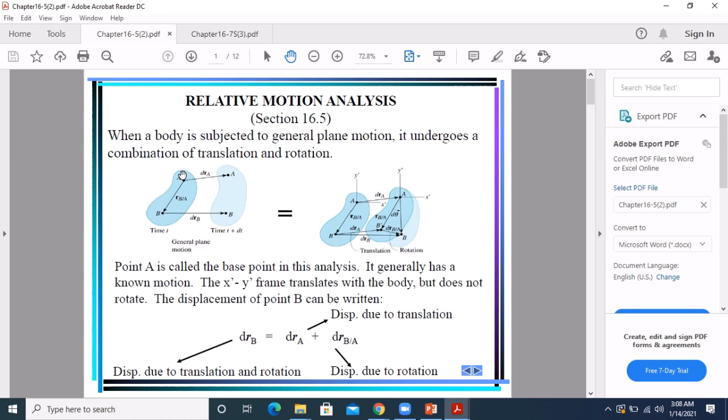بدي اقسم الموشن كالتالي، بدي اخليه يعمل translation. خليني بس هون اعمل full screen. بدي اخلي الريجد بودي هذا يحافظ على الروتيشن تبعه بالبداية، يعمل translation at this point، فمشى مسافة DRA اللي هي جزء من البوزيشن او displacement تاعت البوينت A اللي مشيتها because of translation لحاله.

بعدين هذا الريجد بودي عمل rotation about an axis passing through point A عشان ياخد هذا الشكل النهائي أو اللوكيشن النهائي، ليش نحكي شكل نهائي؟ لأنه الشكل تماما ما تغير. فعمل translation DRA، فالـ B point بسبب الترانزليشن موقعها موجود هون. بعدين صار في روتيشن للريجد بودي فصار الفاينل بوزيشن تبعها هون، يعني هاي الفاينل بوزيشن تبع B اللي بيست على الترانزليشن او روتيشن. بدي اقسمه لـ translation first then rotation.

فصار عندك الـ DRA اللي هو بيست على translation، وهذا الـ DRB اللي هو final position اللي هو ناتج من DRA plus this rotation of B من هذا اللوكيشن لهذا الفاينل لوكيشن، اللي هو عبارة عن DRB with respect to A، لأنه احنا بنحكي الـ rotation about an axis passing through one of the points اللي هي point A بهذا الكيس تبعتنا. فصار عندي DRA plus DRB with respect to A عبارة عن DRB.

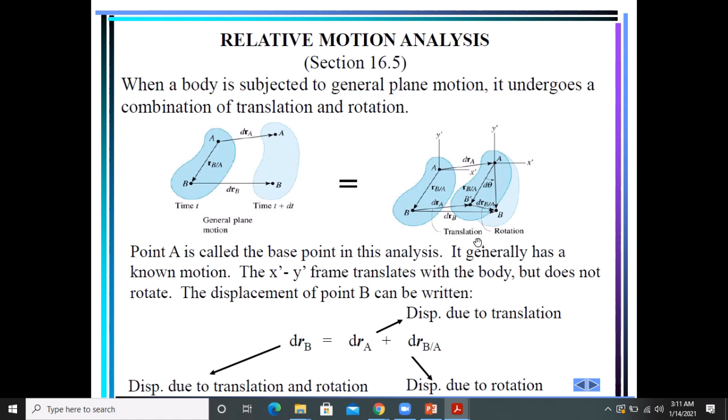So حكينا but does not rotate. The displacement of point B can be written DRB عبارة عن DRA اللي هي displacement due to translation plus DRB with respect to A اللي هي due to rotation، بيعطيك الفاينل location for point B based on translation and rotation.

So the velocity of point B is given as بدك تاخد dt for this one and this one. So DRB by dt عبارة عن DRA by dt plus DRB with respect to A by dt. DRB by dt هي الـ absolute velocity of point B، اللي هي الفاينل، يعني velocity of point B الناتجة من translation and rotation، يعني عبارة عن velocity لـ point A اللي عم بيعمل pure translation plus the velocity of point B with respect للروتيشن اللي حصل about point A. فهي whatever rigid body عم بيعمل whatever الموشن تبعته general plane motion VA.

الريجيد بودي هيعمل translation، هيكتسب A و B the same velocity بسبب translation. Then B هتكتسب another component velocity بسبب rotation of rigid body about an axis passing through point A اللي هو عبارة عن أوميجا في RB with respect to A. Since the body is taking as rotating about point A, VB with respect to A اللي هي عبارة عن dr B with respect to A by dt عبارة عن أوميجا cross RB with respect to A. Here omega will only have a k component since the axis of rotation is perpendicular to the plane of translation.

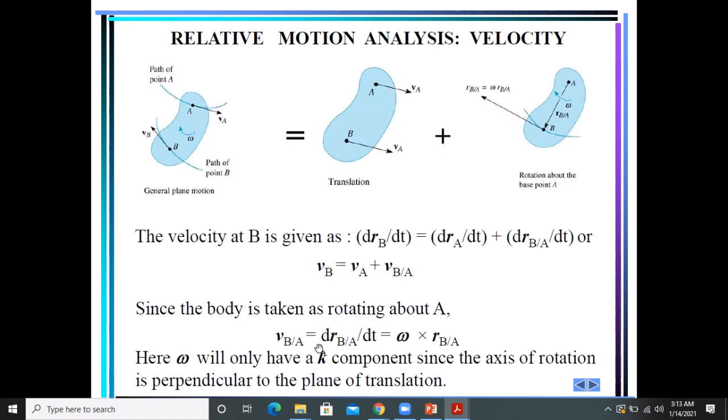طيب ناخد example relative motion analysis velocity.

Example: suppose you have this rod connected with pin connection, so the velocity of point B equals velocity of point A plus omega for rod AB crossed with RB with respect to A. From the other side, velocity of point B equals velocity of point C plus omega BC crossed with RB with respect to C. So when using the relative velocity equation, points A and B should generally be points on the body with a known motion.

Often these points are pin connections in linkages. For example, point A on link AB must move along the horizontal path, whereas point B moves in a circular path. The direction of velocity A and B are known since they are always tangent to their paths of motion. Since point A is confined to this slot, it will acquire velocity horizontally. Point B is performing some type of rotation about this point, so it will be tangent to the path at whatever instant.

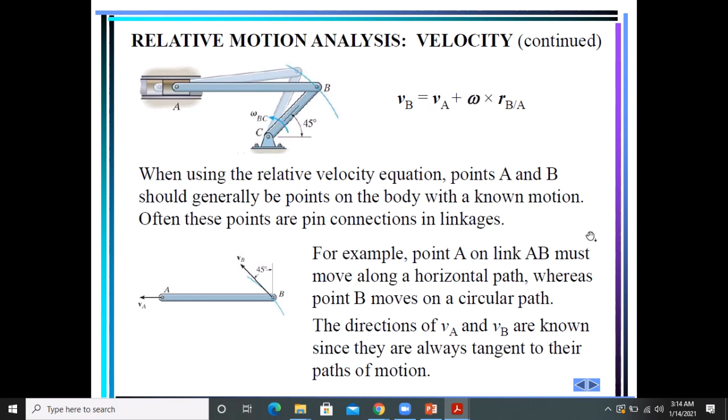Take the example of wheels, especially when we talk about rolls without slipping. Velocity of point B equals velocity of point A plus omega cross RB with respect to A. Of course, velocity of A equals 0 because it rolls without slipping, since bodies in contact have the same velocities. So the point of contact with the ground has velocity 0.

This point we'll call shortly the instantaneous center of zero velocity - this is instantaneous, at this moment. This is the point with zero velocity. Shortly after, when there's rotation, another point will have zero velocity, and this point will move to another location, and so on.

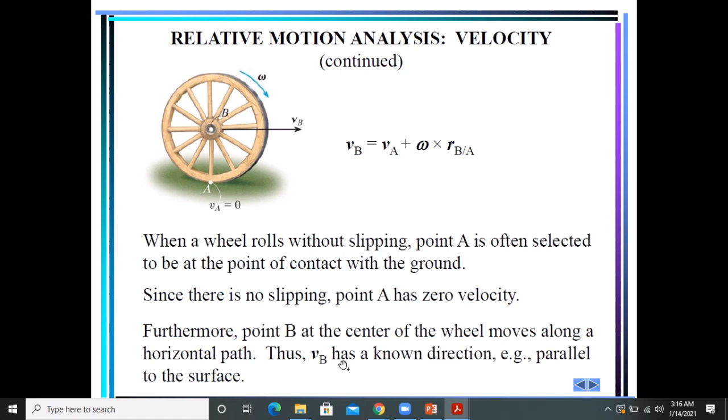So the velocity of point B for wheels, discs, cylinders, or whatever rolls without slipping equals the velocity of the point in contact with the ground, which is 0, plus omega cross RB with respect to A. So this component is always 0, leaving just this component. Since there is no slipping, point A has 0 velocity. Furthermore, point B at the center of the wheel moves along a horizontal path. Thus the velocity of B has a known direction parallel to the surface.

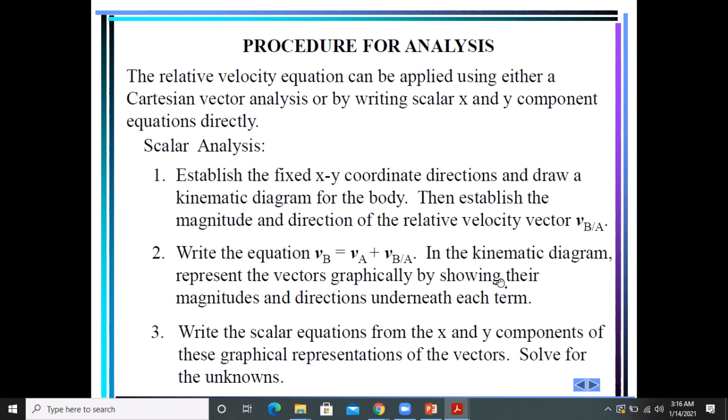Procedure for analysis: establish fixed XY coordinates, not the coordinates translating with the system or with the rigid body. Write the equation in the kinematic diagram. Write the scalar equation from the XY components. Solve for the unknowns. If you want to work on vector analysis, determine XY, take whatever vector components exist, express vectors in Cartesian vector form. If the solution comes out negative, it's opposite to the assumption you made, and so on.

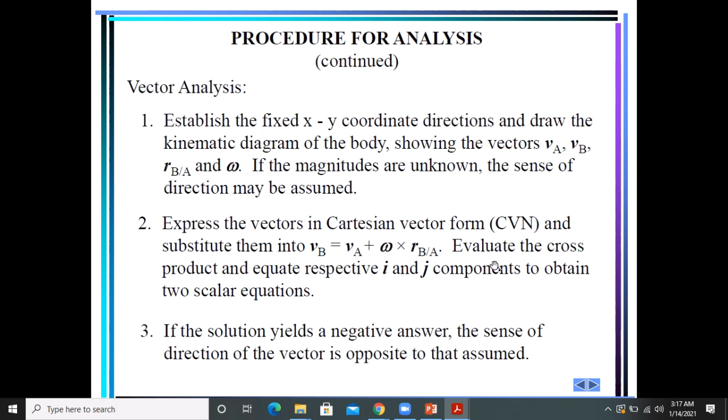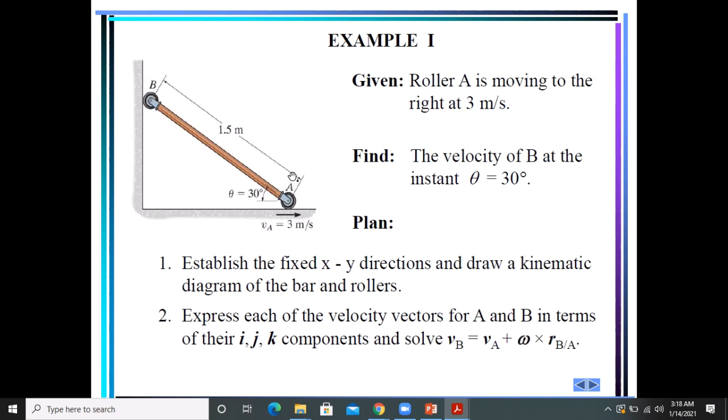Omega is along K. R B with respect to A, from A to B, takes cosine 30 times negative I plus sine 30 times positive J. So again apply the equation: velocity of B is minus VB along J, velocity of A is 3I, omega is along K crossed with the vector from A to B which is 1.5 meters: 1.5 cosine 30 negative I, 1.5 sine 30 positive J.

Perform the cross product: K cross I gives positive J, and with the negative sign, K cross J gives minus I. So we get the equation with components: along J plus whatever, 0 along I, we get 3I minus 1.299 omega along J minus 0.75 omega along I.

So first, equate the I's with the I's and the J's with the J's. So from the left side, 0 equals 3 minus 0.75 omega. From this we can calculate the value of omega. The J equation gives minus VB equals 1.299 times omega. We already calculated omega from the first equation, so substitute into the second equation to find the value of velocity of point B.

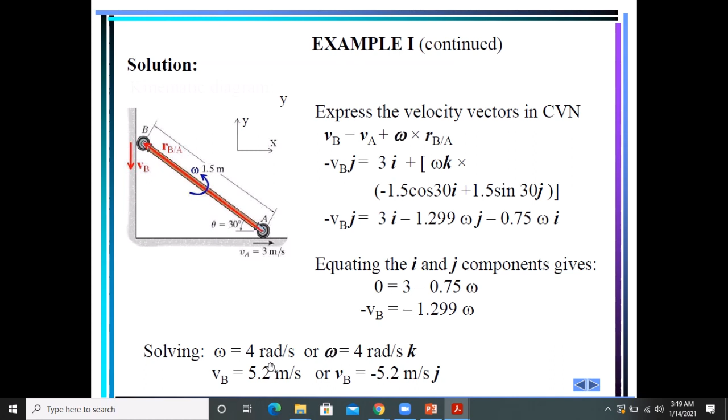So omega turns out to be 4 radians per second in the K direction, and velocity of B is 5.2 meters per second, or minus 5.2 in the J direction.

Another example: crank rotates OA with an angular velocity of 12 radians per second. This gives us omega for OA. We need to get the velocity of piston B and the angular velocity of rod AB. We'll work through this in two steps. First, velocity of point A equals velocity of point O plus omega for OA crossed with R A with respect to O, from O to A.

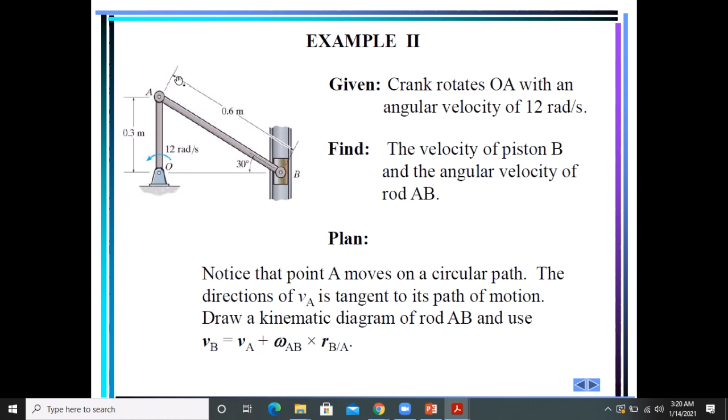We can calculate the value of velocity of point A using I and J components. Then we move to the other side: velocity of point A equals velocity of point B plus omega for AB crossed with R B with respect to A. Same procedure as before: velocity of B is defined along the J direction, omega is in K, velocity of A we calculated with I and J components, and we equate the equations, same thing.

We calculated first the value of velocity of point A, then we applied the relation between B and A to find the value of omega and the value of velocity of point B.

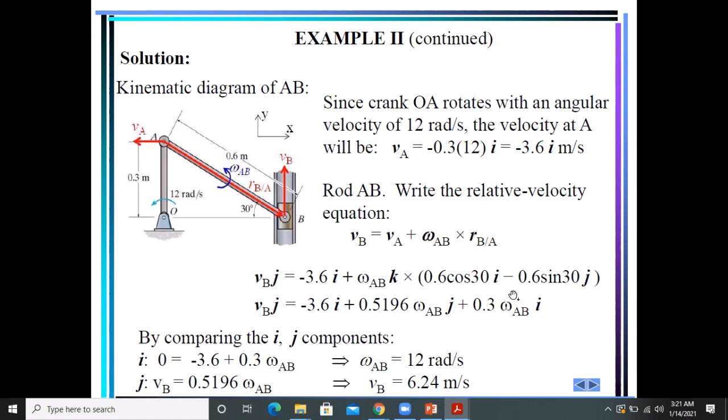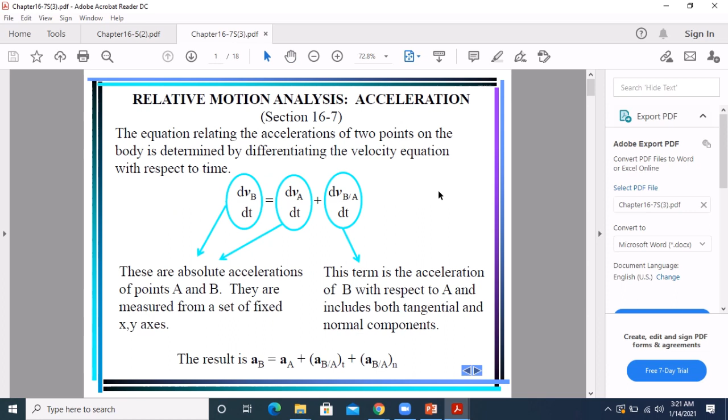So, relative motion analysis for acceleration analysis, for velocity and acceleration. We take the time derivative of the equation we had: dVB by dt equals dVA by dt plus dVB with respect to A by dt. Here, the absolute acceleration of points A and B is measured from the fixed xy frame.

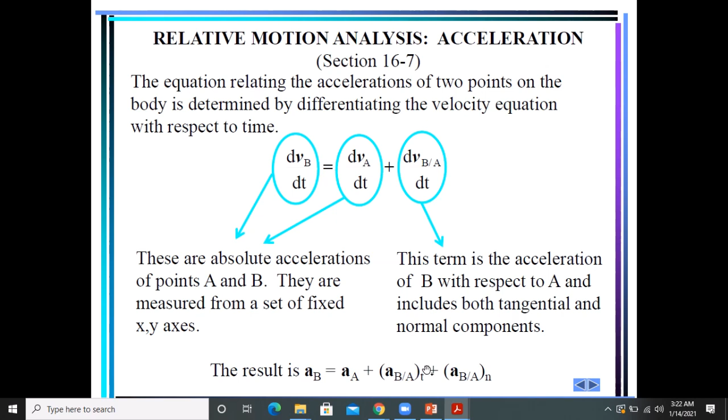The term acceleration of point B with respect to A is like having rotation about point A, so you have a tangential component and a normal component. So the result is: acceleration of point B equals acceleration of point A plus acceleration of B with respect to A tangential component plus acceleration of B with respect to A normal component.

Graphically, this represents general plane motion: translation and rotation about an axis passing through A. It's as if the rigid body as a whole is translating and gains acceleration equal in magnitude to the acceleration of point A. Then point B gains another component resulting from rotation about A, or the rigid body rotating about an axis through A, so it gains a normal component toward A and a tangential component tangent to the path.

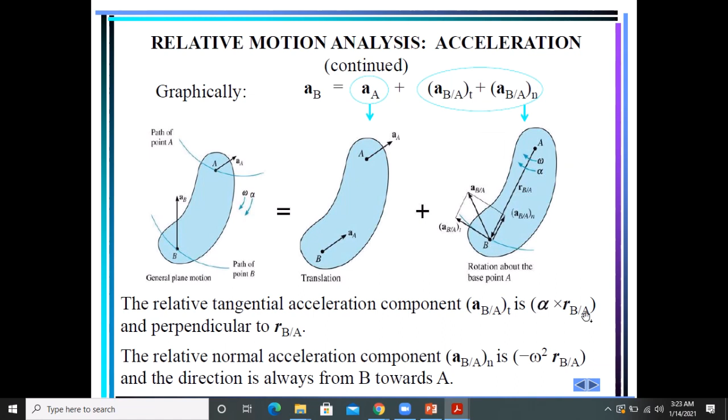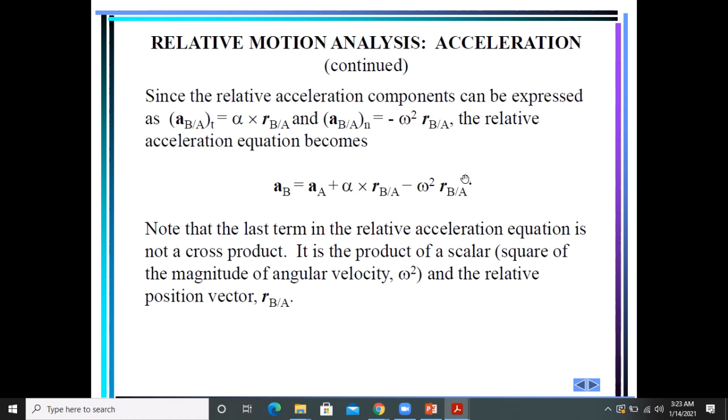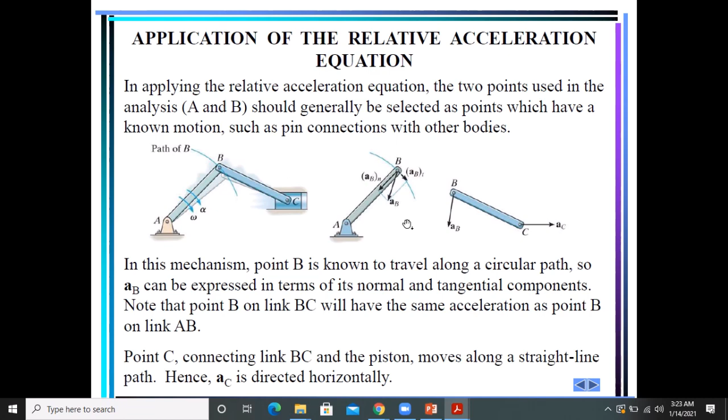Same applications apply to connections of whatever linkages and rods combined. The procedure for analysis is the same thing: establish a fixed coordinate system, draw the kinematic diagram, apply the equation, the relative acceleration equation, and so on.

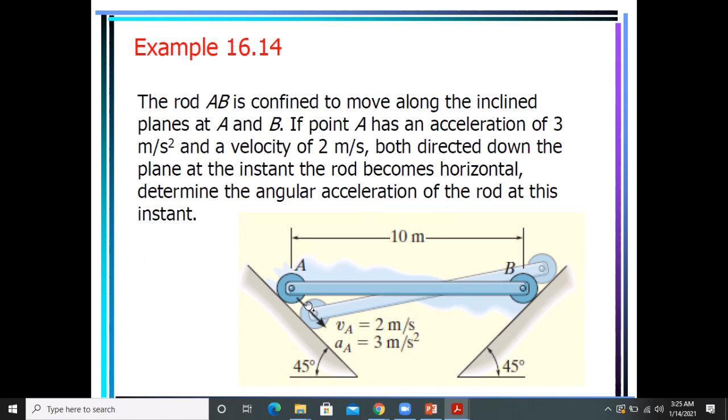So I have many unknowns. Acceleration of B is unknown in magnitude; its direction must be along the plane, either up or down. Acceleration of point A, magnitude and direction, are known. Alpha's magnitude is unknown, but its direction is known to be in K. R with respect to A is known from A to B, which is 10 meters in the I direction. Omega is unknown. R with respect to A is also known, same as this one, 10I.

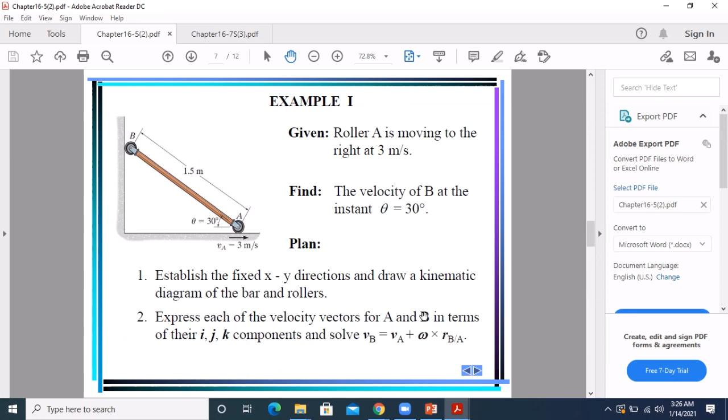Here too, with I and J, I have 2 equations and 2 unknowns: velocity of B and omega. Velocity of A is already known. So we apply this equation and we can get the value of velocity of B and the value of omega.

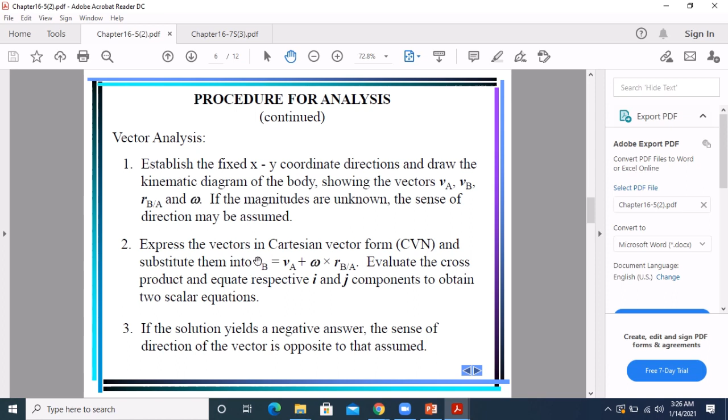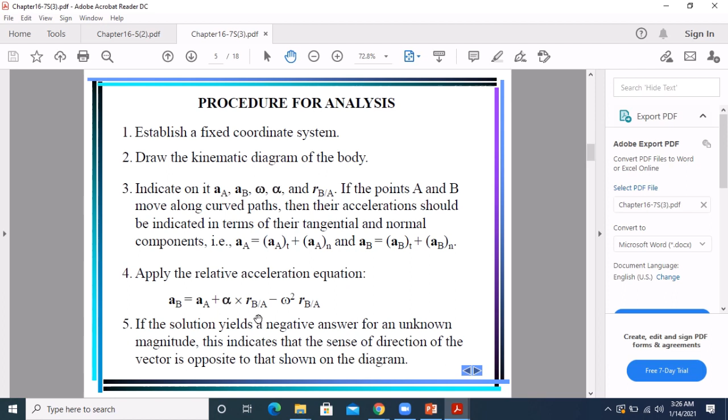After we apply the equation of relative velocity, we calculated our omega and it came out to 0.283 radian per second. Then we apply the relative acceleration equation: acceleration of point B equals acceleration of point A plus alpha cross R with respect to A, minus omega squared times RB with respect to A.

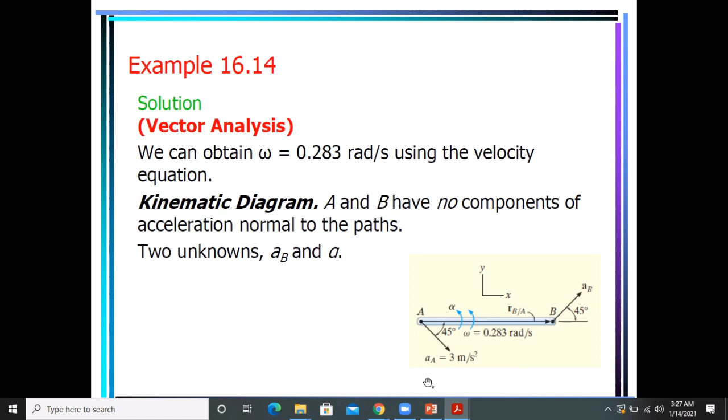Acceleration of point B analysis: times cosine 45 for the I component, times sin 45 for the J component. Acceleration of A: cosine 45 for I, minus sin 45 negative J. This one: alpha K cross 10I, omega squared times 10I. Same thing for acceleration B with I and J components.

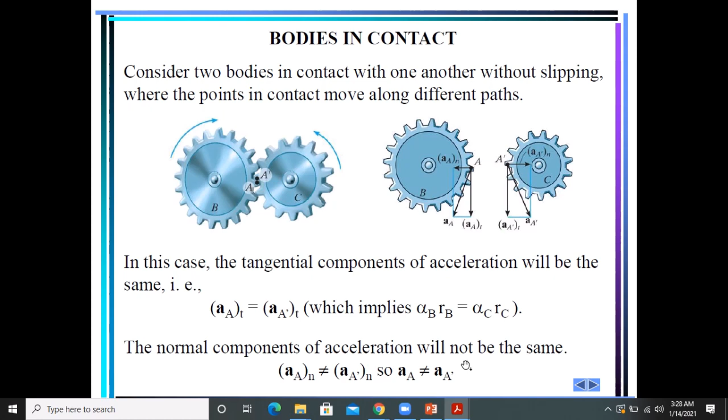So we can work on the radius ratios to find whatever alpha values we need. But the normal component will not equal the normal component, so the resultant acceleration of A is not equal to acceleration of A prime, but the tangential component is equal.

This is a common type of problem encountered in dynamics, which is rolling without slipping, we talked about it a moment ago. In rolling without slipping, we said the velocity of point G equals the velocity of point A, the point of contact which we call the instantaneous center of zero velocity, plus omega times R.

Same thing applies for acceleration. Of course point A does not have zero acceleration, it has zero velocity but not zero acceleration. So as the cylinder rolls without slipping, point G, the center, moves along a straight line, and omega and alpha are known.

The relative velocity and acceleration equations can be applied to A. At the instant A is in contact with the ground, point A is the instantaneous center of zero velocity, however it's not the point of zero acceleration.

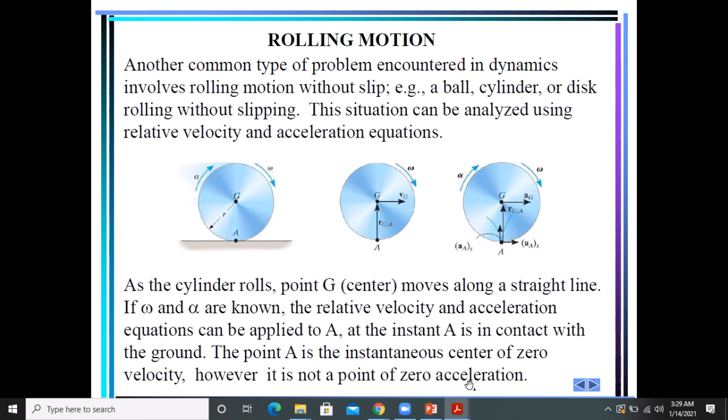You need to have omega and alpha and apply the equation of relative acceleration. Here's the relative velocity of G: velocity of G equals velocity of A plus omega cross R G with respect to A. This one is zero. So you have omega K, based on the assumed direction, minus omega K cross R from A to G, which is RJ. Velocity of G is assumed to be in the I direction, so K cross J minus I with minus positive I, so the result is valid as we agreed.

Here apply the acceleration of G: acceleration of A plus alpha cross RG with respect to A, minus omega squared times RG with respect to A.

Acceleration of point G will be in the I direction, acceleration of point A will be in the J direction, whatever. If you take the J just before touching the ground or after touching the ground, sometimes it will come out in the negative I, J direction, sometimes in the positive J direction.

So the acceleration, assuming it's in the J direction, gives us alpha minus alpha K cross RJ minus omega squared times RJ. This one is the J component: K cross J minus I with negative positive I, and here minus omega squared times RJ.